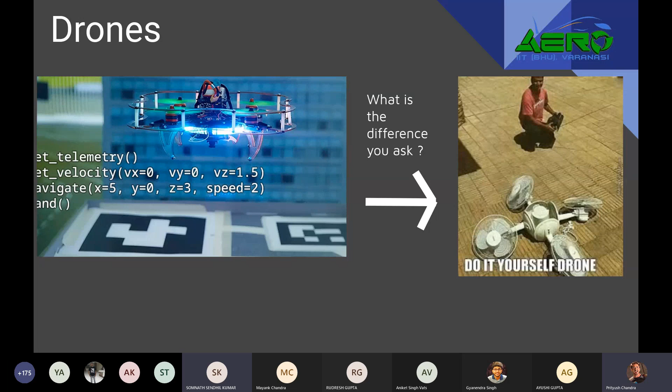Thank you, Somnath. Hello guys, this is Vishnu from Electrical Part 2. Here we will discuss about what is ROS and how it works, what are its advantages, and how do we implement it in our club.

Basically, ROS stands for Robot Operating System, and even by the name you can sense that it helps us in operating robots.

In order to understand about ROS, you need to know what is a robot. Whenever you hear the word robot, quickly a picture comes to mind, like you can see on the left side, huge giant robots similar to humans that can perform similar tasks like jumping, walking, and running. But the actual scene is, a robot is a programmable machine that can perform a series of tasks automatically, and it can be a drone or mobile bot or robotic arm or any other. Basically, shape depends upon their functions.

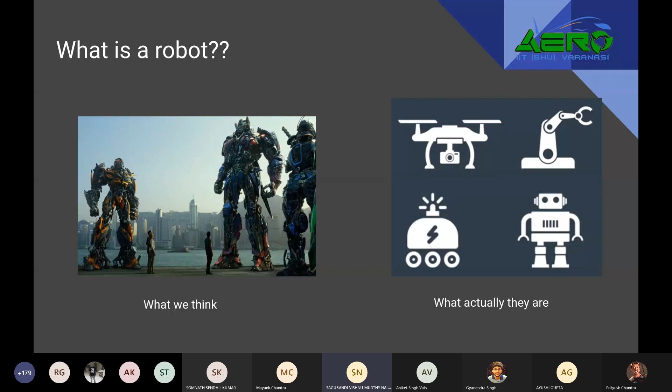And irrespective of their shapes and functions, every robot shares the same basic characteristics: perceiving the world around them, software for making high-level decisions, and motors and controllers for actuation. But how are all these components interconnected, and how can we actually work on it?

ROS provides a powerful communication system allowing all these components like sensors and motors to connect with each other, allowing message passing between them and making the robot work properly. So ROS is a software framework that helps us in robotic development.

And it is not a typical operating system like Windows and Ubuntu. ROS also provides us various tools for visualization and simulation, which we will discuss about within a short time. This is a brief explanation about ROS.

Now we will discuss how ROS works at low level, actually how ROS works at hardware. Let's try to understand this by considering a hand gesture drone that we're actually working on. Similar to other robots, it will also perform the same three high-level tasks of perception, decision making, and actuation.

ROS divides these complex tasks into smaller units called nodes. Nodes are just pieces of software that can be written in C++ or Python, and each node is assigned to a certain task, like one node to collect images from camera, and another node to estimate distance between us and the drone using LiDAR, and many others. So ROS connects all these nodes together and allows message passing between them, making the drone function properly.

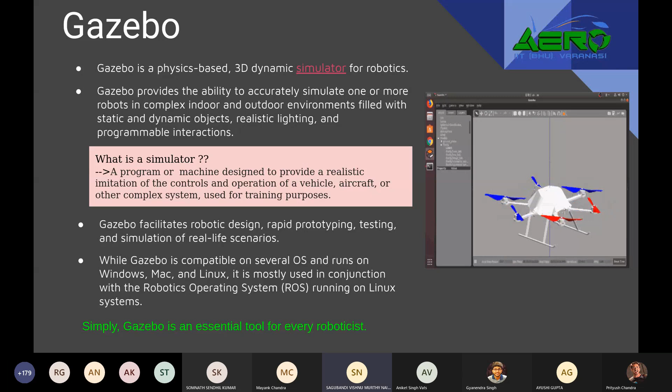So this is simply what about ROS and Gazebo, and we can say that Gazebo and ROS are the essential tools of every roboticist. And now I will handing this to Yash, and he will explain you about how ROS and IoT are interconnected and so on.

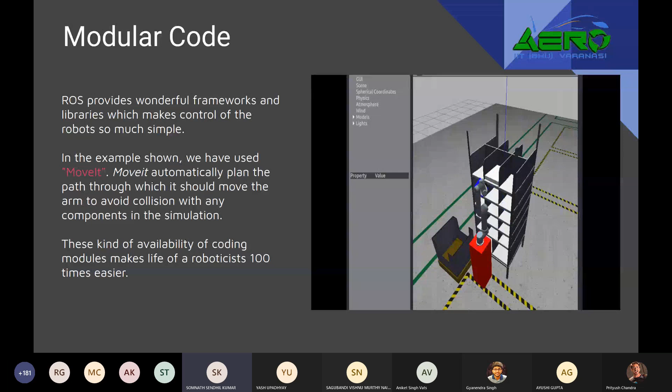Thank you, Vishnu and Yash, for a good brief of ROS. For everyone else, do listen to this. This is what ROS basically is, because I know a lot of you have no good idea about programming or simulators or anything such, so this is just to get the basics out. Next, I would continue with the other presentation showcasing the implementation and the hardware.

This is the basic idea of ROS, that you can make technologies accessible to everyone. And when you add new hardware, the sensor data or all the data just plots into your ROS system, that is your laptop. It just comes in here and it plots and showcases it for you. So this is a very easy way of doing it, and ROS helps a lot in this.

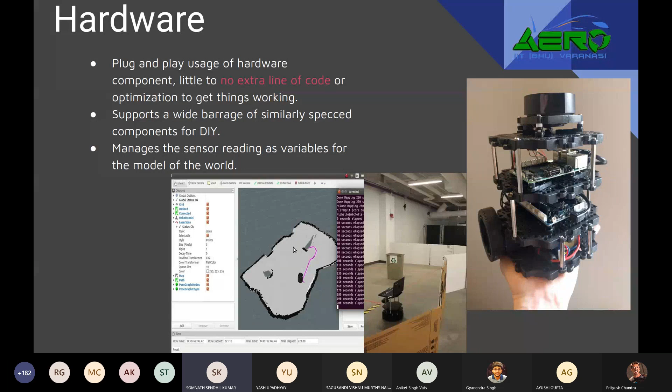Now, what I would like to show further is some of the implementations that we at AMC have done this year and previous years. This is to showcase what ROS is capable of and what you should be expecting from the club. These particular projects are going on, and you could join to improve them or give a new idea, and so forth. So without wasting any time, let's start with drone simulations.

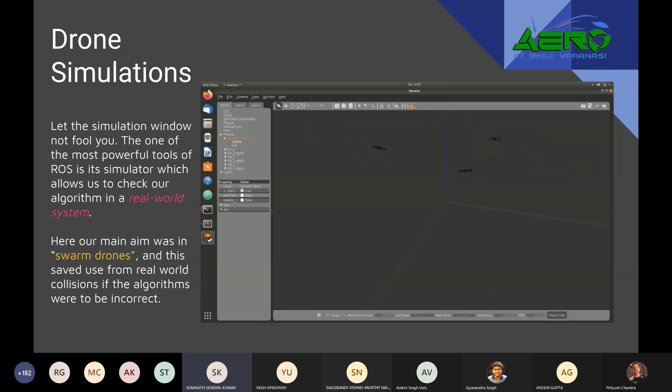Now I believe you did see the Gazebo simulator. This is the same Gazebo simulator, but rendering three different drones at the same time. Here the basic idea was swarm drones, drones trying to follow paths while keeping in mind that there are other drones near it. Really implementing this directly in a real world situation would be very messy, because they may collide into each other and you're just losing money. So it's very important to use a simulator like Gazebo, which gives accurate modeling of the world, and hence you can deploy it with the push of a button. That's the easiest process you can do, and ROS helps you in that.

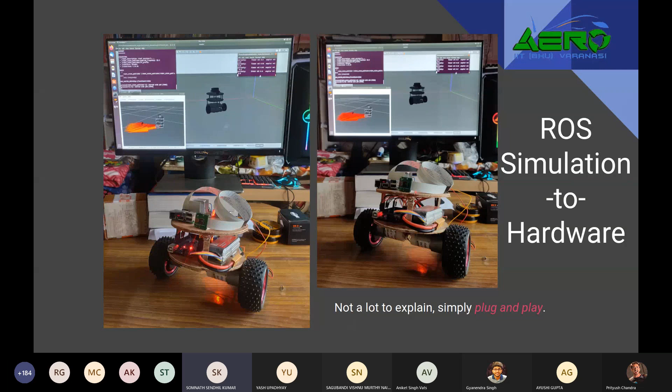Next, I would go into the hardware. Here you can see this is the Turtlebot, and I believe you saw a few slides before a Turtlebot which was more complex, blackish, and cooler than what I've made here. This is something I made back home, and here you can see it doesn't resemble that a lot - it just has a few components. But you know what, I didn't have to code even a line to get it working. I guess you can see behind, it just maps the bot as it is in the real world situation, without needing any extra lines of code from my side. So it's simply a plug and play solution. This is really important for a beginner like you, who may not know Arduino or some other part, but ROS is always there to help you.

Next, this is the coolest part for every beginner and fresher I have ever seen: machine learning. Now I believe a lot of you have heard of what machine learning is. Machine learning is basically a way of making machines smart, or taking intelligent choices or decisions.

Now it's nice that we can control our drones, but who is deciding how it should move or what angle it should tilt, or anything as simple as that? We would need some machine learning algorithms to do that.

Now to run this you would need a beefy system, but that wouldn't be on your drone. Hence parallel computing is something that comes to mind, and ROS is really one that strives at doing so. This is an industrial standard method, and hence it is accessible to beginners and students like us. So this is how ROS would help you.

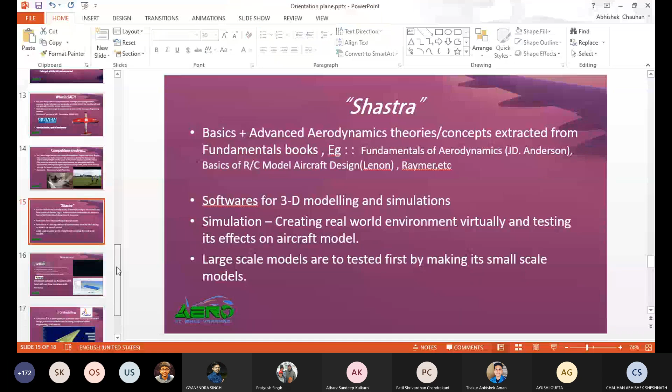We can also see that large scale models are tested before they are made. Companies like Boeing and Lockheed Martin test their fighter jets and passenger planes by making smaller scale models and testing them in wind tunnels and with various simulation software. So we'll look further at what simulation software is used for making such a model.

So there are two types of simulation software. One is XFLR5 and the second is ANSYS.

So we'll discuss more about what XFLR5 is. XFLR5 is a software, an analysis tool. We use this software to make an early initial estimation of which will be our best airfoil, the best shape of airfoil to meet our mission profile and mission requirement. This software is low size, doesn't require a high-end system, and is computationally fast too, so it's easy to simulate in this software.

You will be much more familiar in the coming workshop with why we give such names to the airfoil. So we can do a series of analyses of this airfoil and make the best out of it, determining which airfoil will be best for our model.

Then comes ANSYS. ANSYS is a simulation software for aircraft models, and further analysis of the full 3D wing is done in ANSYS, and it is known for its accuracy. It gives a lot more accuracy while calculating lift and drag values, or any aerodynamic force, or coefficient of moment, or any other parameter. It gives us an accurate value, and we can also do a full aircraft model analysis on ANSYS.

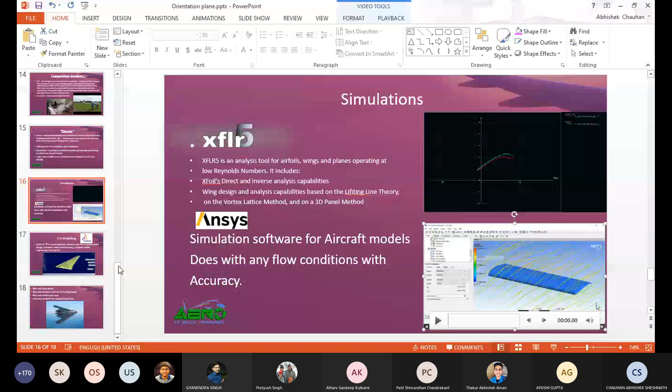So where do we make all such models? Whenever our design layout is completed, we generally do modeling, 3D modeling, in CATIA. It's a software by the Dassault company, the software name is CATIA V5, and we do all the designing part in this software.

You can see here we have made a full 3D wing. It's a tapered wing, and you can see we can also install a lot more detail here. There are spars here, and we can do much more detailed dimensioning. So 3D modeling is very much essential to finalize our design layout.

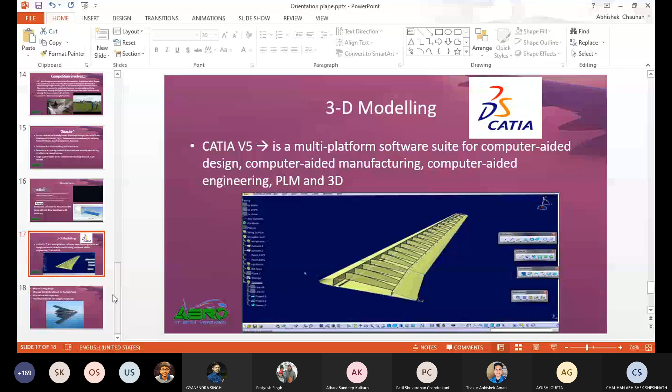These designs are not just for fashion. They are meant for minimizing drag and making the overall plane lift efficient, though they also have more advanced technologies like radar technology, because it's a stealth aircraft. They have all these technologies, but the design part is much more efficient, because it creates more lift and less drag.

So you too can be a part of a team if you are more enthusiastic towards this type of concept, and you are looking forward to innovating such models, and learning such software. Then you are truly welcome in our club, and I will now be handing over the mic to our senior, the coordinator of SAE, Mayank Chandra.

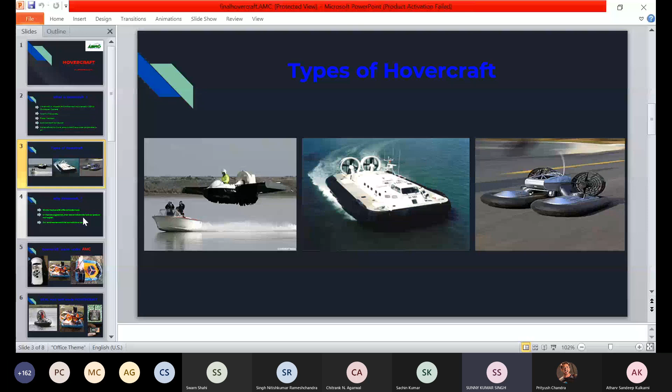But a hovercraft can easily run over it because it only needs the surface. It's not going in, it runs over the surface. Moreover, hover provides very little drag friction as it floats on air. But in the case of a boat, some parts lie below water, which provides much drag friction.

Now consider a case where there is a bog type of land, like what we call daldal in Hindi. Then we cannot land our plane or helicopter there, but a hover can float on that bog surface very easily. Also, hover can drive easily on sand.

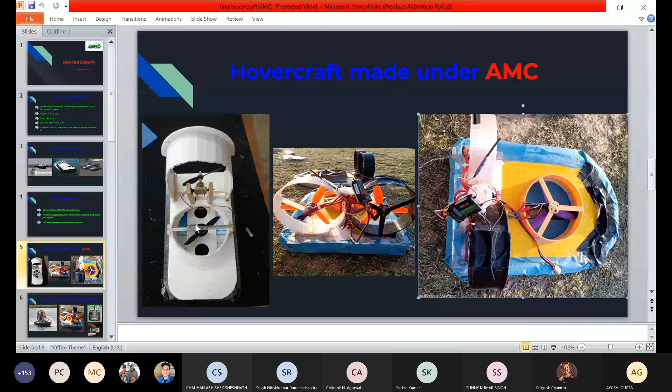So real and self-made hovercraft. Excuse me, bhaiya.

Excuse me, I'm not able to access the chat box. I think there may be an internet connectivity issue from your side. No, there isn't. There should be that icon beside participants and raise hand - those two icons are there, but my chat box request to join is not accepted. I did not get any link, I only got the meeting link posted in the group by a senior. Do you have any doubt or want something? No, this is the problem - I'm not able to access the chat box, so I cannot do anything. Let others see if possible, they can help you. If you have any problem, you can say now. Okay Sunny, continue.

Yes, it can move left and right by controlling the propeller speed. Both propellers work together. If you want to move left, one motor has to run faster compared to the other. I mean, if you want to take a turn, then one motor has to be faster. So according to your motor rotation, whether you're taking left or right will be decided.

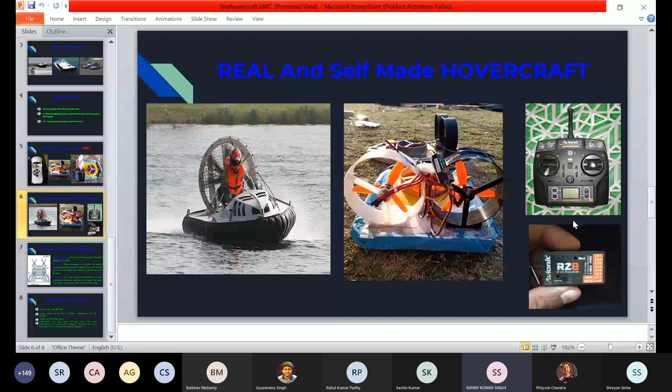Our next slide is about the working and the parts of the hovercraft. I have already explained its working. There are only three main parts. The first one is the propeller. The propeller basically pushes the air behind, and thus the hovercraft moves.

The second one is the fan. The main purpose of the fan is to make the air cushion, so the hover can lift up and float on air. So when the propeller provides thrust, it moves very easily ahead.

The last one is the skirt. The main function of the skirt is to overcome obstacles. The higher the skirt, the larger the obstacle the hovercraft can overcome. So you can see this is the skirt - this whole thing is the skirt.

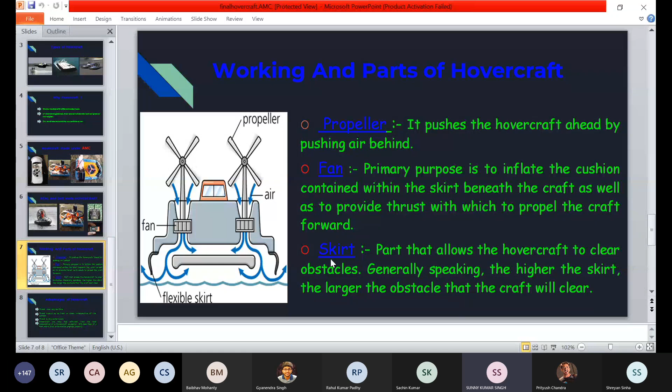Moving to our last slide, advantages of hovercraft. As I told you earlier, hovercraft can run everywhere on any surface. It can travel at the same speed upstream as well as downstream, so there is no problem with river current. And hovercraft is very fuel efficient - it consumes 70% less fuel than a petrol boat with similar payload capacity. So I hope you got an idea about hovercraft. That's it for this. Okay, I am done.

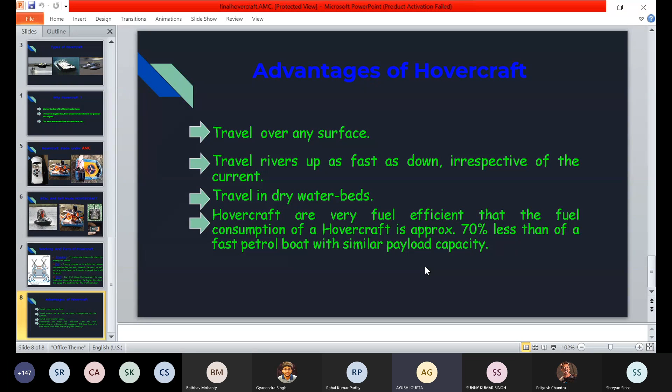Thank you, Sunny. Now Abhishek will brief you about the plane. Sunny, sorry, Abhishek. So the plane will be described by Gyanendra. Keep it short because some freshies are leaving, right? Gyanendra will start, followed by Deepak and then Sunny. Okay, Gyanendra, go for it. Okay, fine.

Let me present my screen. I've already presented, Gyanendra. Okay, fine. Visible, right? I guess it's not visible. No, it's not visible. Okay, I'm sharing once again. There you go. Is it now visible? Yes, yep, it's visible.

Fine, perfectly fine. Okay, so myself, Gyanendra Singh from Civil Engineering, Part 2.

I guess Abhishek has - listen, there are two Gyanendras, one from third year electrical, and another Gyanendra from civil second year, right? Yeah, we are having two. Don't be confused.

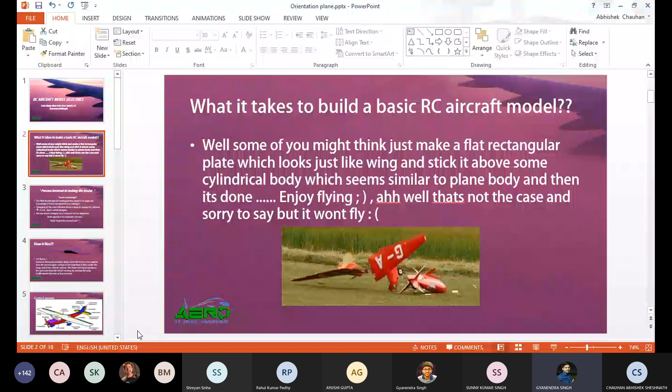Let's begin. Let's actually discuss the RC aircraft model. So we'll discuss the process involved in making the RC aircraft model.

For that, I guess you should know the basics, very basics of aerodynamics. That is the normal thrust, lift, and weight. These are the normal forces, which we'll discuss in the later workshops.

That is the very basics required for constructing an RC aircraft model. Now, the airfoils which we select are designed in various PC softwares. Some of them have been mentioned, I guess two: Xfoil and NASA's airfoil designer. As you all are beginners, we'll be using NASA's designer for designing our airfoils.

The entire purpose of building an RC aircraft model is that we have to maximize L by D ratio, where L stands for lift, D stands for drag. I'll let you know later what lift and drag forces are. In the next slide, I'll let you know.

Next slide please. Here we can see the vertical force acting on the plane, this is known as lift. It provides the movement to the plane, this lift provides the upward movement, and thrust to the plane. The drag, the direction of drag has not been shown here, but the drag acts opposite to the direction of motion. If the plane moves forward, the drag acts backward. It is because of the friction force.

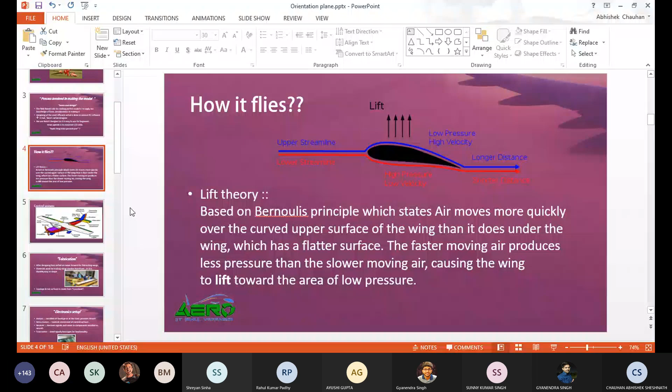So now we'll be discussing the various parts of an RC aircraft. Next slide please. Parts of an RC aircraft.

The red one you see is known as the fuselage, this is the main body of an RC aircraft. And the white one is known as the wing, you all know this. There are several other parts apart from this.

This is the propeller, which propels the plane forward in the forward direction. And you can see the extended flaps at the rear end of the wings marked in green color, these are the ailerons, the flaps on the wings.

At the rear end of the plane, we also have some flaps marked in green, known as elevators. And on the vertical side at the rear, the flaps are known as rudders, all having their different functions. They control the various pitch movement, yaw movement, and roll movements. We'll talk about this in the later workshops in detail, so for now just remember what I told you.

So the most important ones are that the red one, this body is the fuselage, and this white one is your wing. The extended flaps of the wings are known as ailerons. At the rear end, the extended flaps are the elevators. And the vertical one on the rear end is known as the rudder. So this is the basic part, I guess you would remember this. I just talked about the basics.

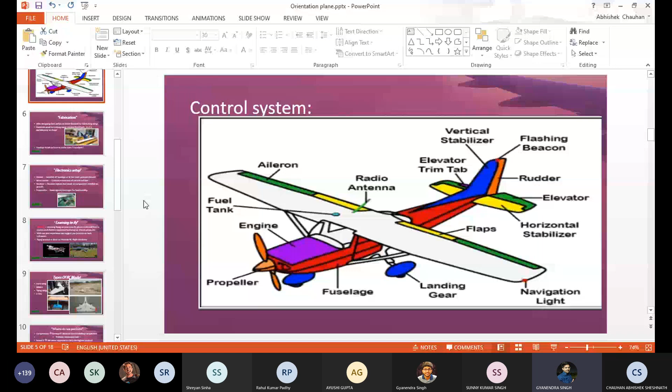I will discuss about fabrication and electronic setup. Firstly, fabrication. In fabrication we generally discuss what material we use to build the plane. We can divide the plane mainly into two parts: first is wings and second is fuselage. For making wings, we generally use styrofoam, Depron, and balsa. Styrofoam is basically a compressed form of thermocol, so its strength is very good. The strength of balsa and Depron is less compared to styrofoam, so we should use styrofoam for our first flight.

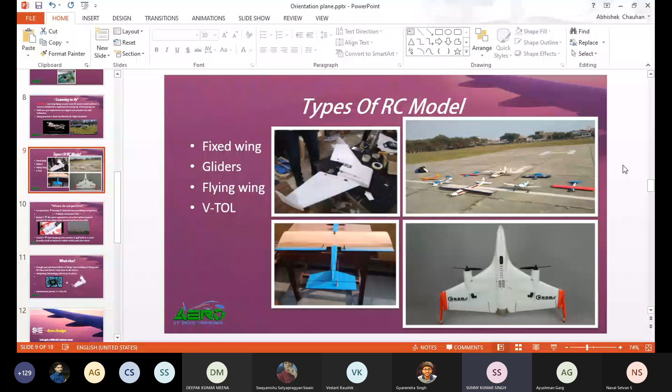This is called VTOL because it takes vertical flight directly, so it's called VTOL. Abhishek, next slide please.

So where do we perform? In all the IITs which have an aerospace engineering branch, Boeing holds a national aero modeling competition. Boeing is an American multinational company that manufactures planes, rockets, satellites, and much more.

In your mind, the question may arise what we'll have to do in the competition. The competition comprises mainly 2 rounds. In round 1, you have to carry maximum payload as much as your plane can lift, and control it properly. After qualifying round 1, you go to round 2, where you have to drop the maximum number of golf balls within the target area. The target may be a circle or a box, and after that you have to make a smooth landing of your plane, otherwise points may be deducted.

Abhishek, next slide please. Till now we talked about only simple RC models, but I want to tell you that we are also working on projects to integrate technology with RC planes, like building autonomous planes, VTOL planes, and we are also thinking to integrate both plane and drone. So yeah, I am done.

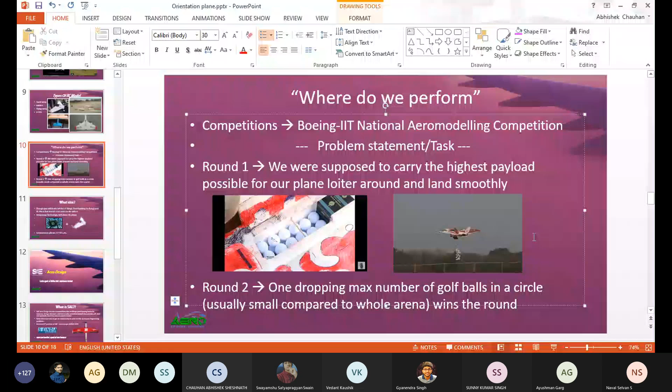Okay, that's it from the RC plane community, and then I'm handing over the mic to Ayushi. Thank you, RC plane community, for your wonderful presentation.

So there are various events which will be conducted in our club. Some are Gaganyaan, Drone Tech, Hovercraft, and RC plane. Gyanendra Bhaiya has already explained these 4 events in the starting. So based on your performance in these events, your chances to become a part of this club will increase. So now I hand it over to Gyanendra Bhaiya.

So basically, I want to share one thing here - the first event, Gaganyaan, will be based on a rocket. Actually, you have to design a rocket in a simulator, and the one thing that you have learned in your JEE time was the rocket propulsion system, right?

You all have learned the rocket propulsion system in JEE time, where the system equation is governed basically by its velocity and its mass. So that equation will be used, and the problem statement - I'm not releasing it officially - but probably it will be that you have to go to Mars and come back within minimum time. The time should be minimum, and the fuel should also be minimum, and the best 3 will be rewarded.

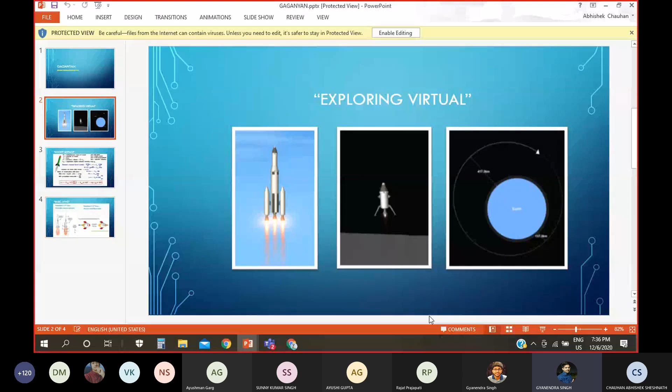Someone is asking a question. You can raise your hand if you want to ask something. For the time being, whoever is asking a question, you can ask it.

Let me explain it in brief. You all know this, let's not get too deep into the topic. Don't take it so seriously - it's mentioned as rocket science, however it's not. It's just a simple thing which you have studied at your 12th, 10+2 level.

So let us consider this is a rocket. The instantaneous mass of the rocket we consider as M, capital M. The mass of the rocket varies because it is filled with fuel and the propellant is ejecting gases at the same time, so the mass changes with time. We consider M as the full mass of the rocket along with the fuel stored in it. ME is the empty mass, the mass of the body of the rocket, and MP is the mass of the propellant.

So we are using Newton's second law: F equals dP by dt. Differentiating the results, this F is the thrust, or the reaction force which acts on the rocket as a result of Newton's third law. As the gases are ejected at a tremendous rate, they exert a force downwards, so as a result of Newton's third law, the force acts upwards. This force propels the rocket to move upward.